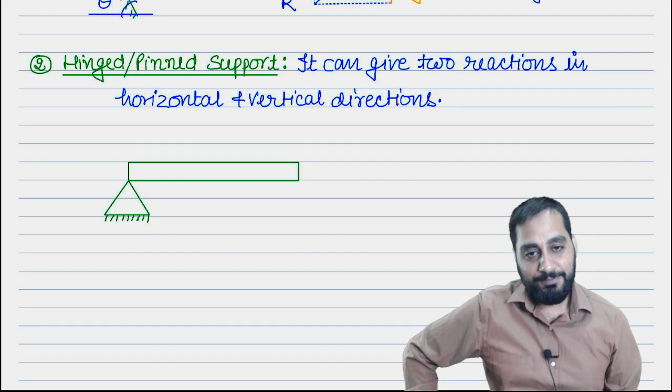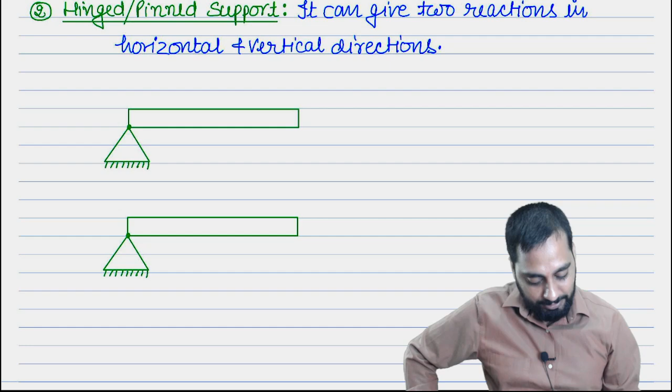Sometimes it is also drawn like this. This is the actual figure. So actually this hinge is like this. You apply a pin here.

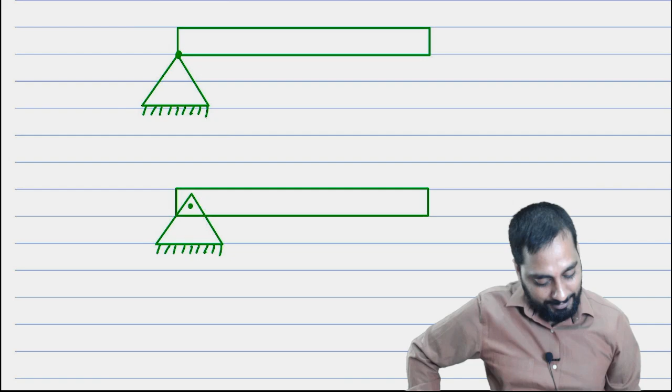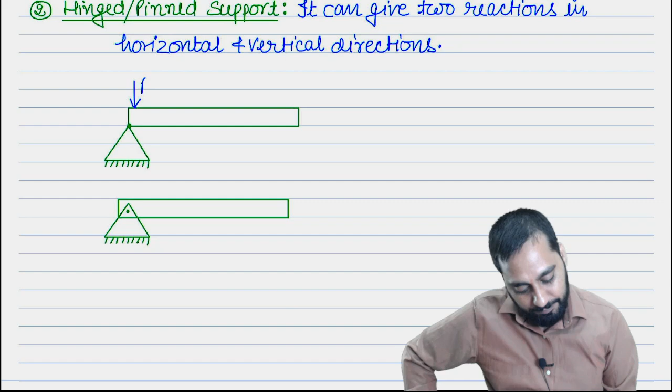Yes, so the actual figure is like this. When you apply a force P here, the beam cannot go down. If you apply a force Q here, the beam cannot go right. It will stop both - when you apply P force here, the beam cannot go down, and if you apply Q force here and pull it to the right side, it still cannot go right.

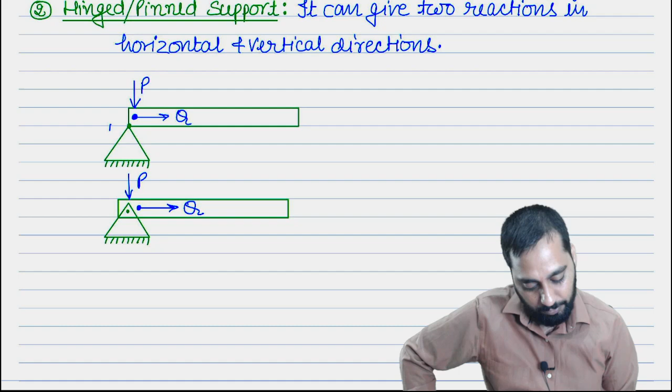Okay, at a point it is a hinge. Hinge means it is pinned - a pin is placed in it. It can rotate like this.

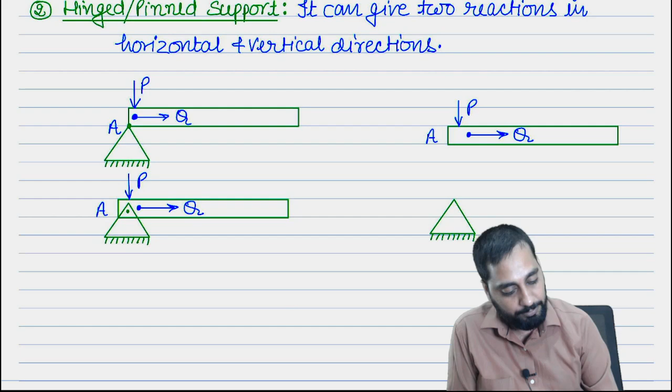So what will be the FBD? So the FBD will be like this. You will separate all the bodies. How many bodies? There are 2 bodies. We will draw both of them. So here both bodies will be drawn like this.

Now P is acting downward but the beam is not going downward. It means one upward force is acting, that is AY. Equal and opposite of AY will act on the support like this. Now Q is applied to the right on the beam, but the beam doesn't go right - it means a force acts leftward on the beam, that is AX.

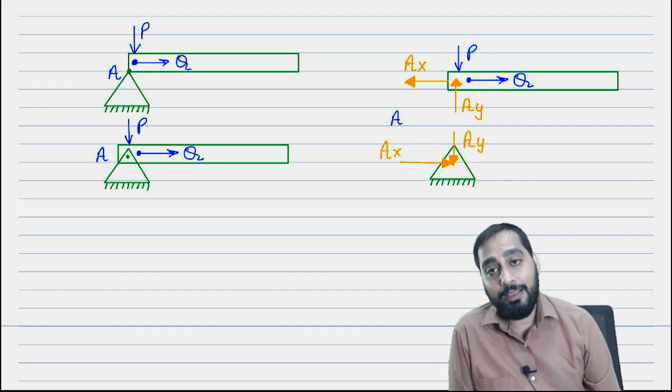One will be perpendicular to the surface and other will be along the surface, meaning horizontal. Okay, so 2 reactions can be there. Now someone can draw a resultant of these 2 - they might say, brother, I'll make a resultant like this. It can be made, but actually the reactions are 2.

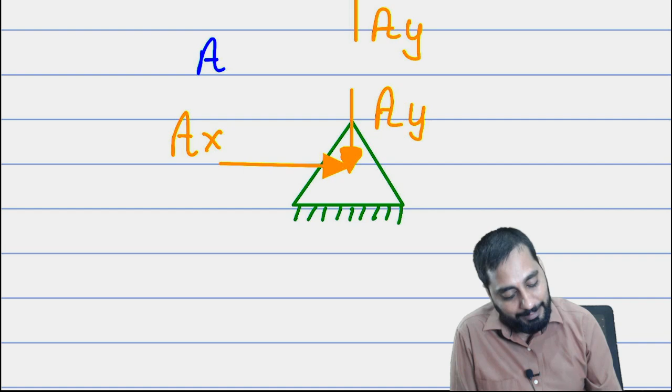So here, this is the thing, this is the thing, this is your point A. This is point A at which all forces are acting. Clear?

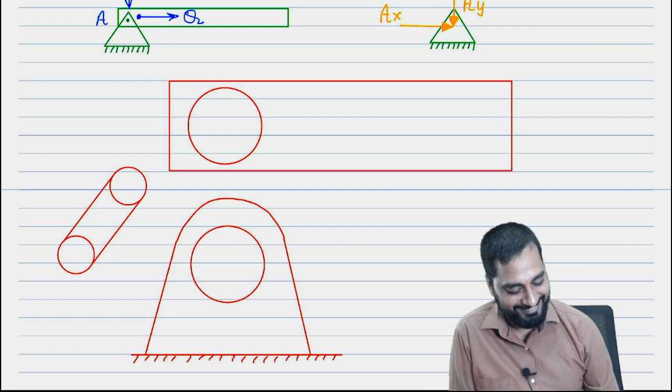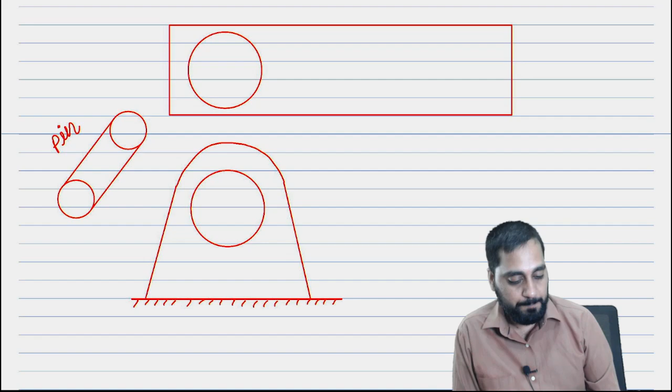Okay, so how is this hinge support made? Look, this is the pin. Okay, this is the pin, and this is the beam.

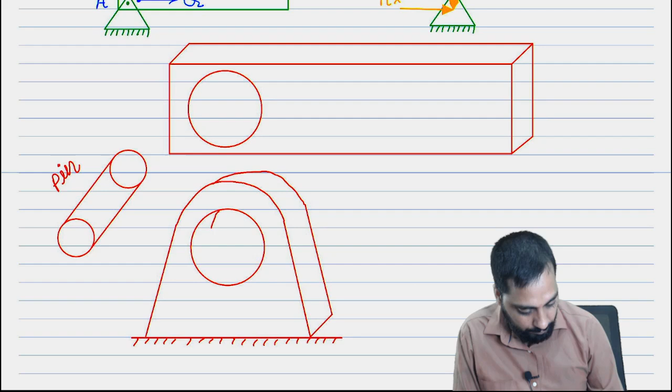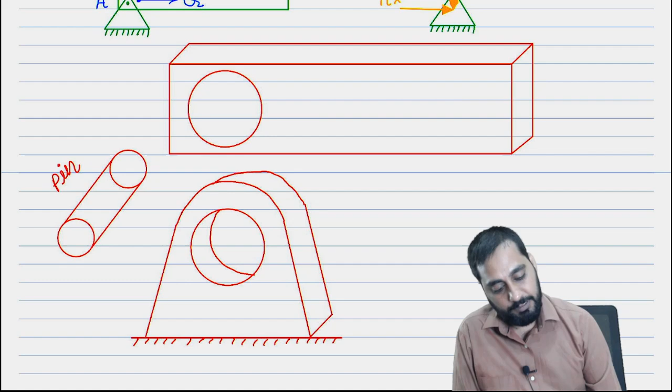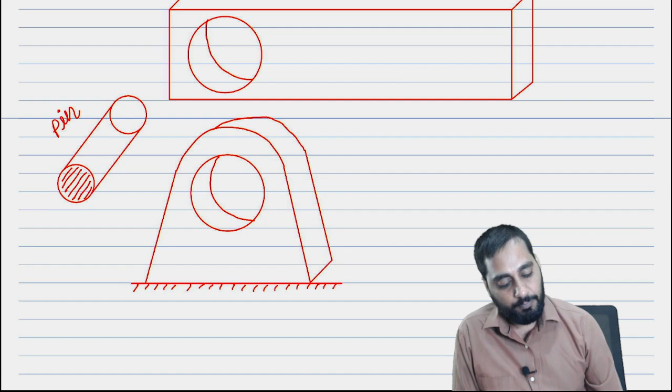Okay. Now, when you insert this pin inside this hole - okay, when you will insert this pin inside this hole - its shaded end will be inserted here. Both sides it will be inserted, yes or no? Both sides it will be inserted.

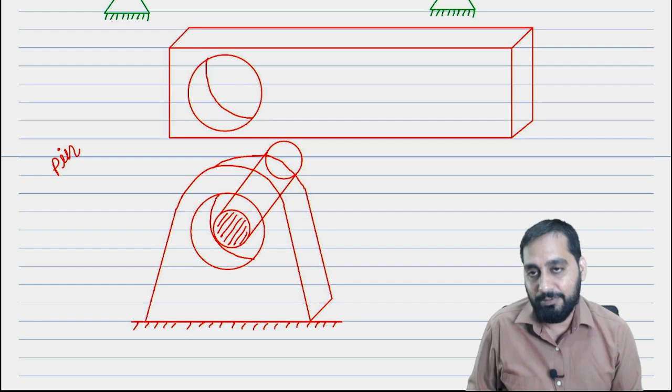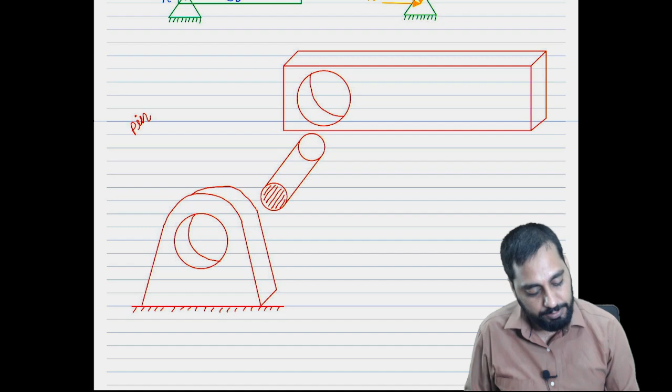So let's draw the figure in a more appropriate manner. Let's bring this here, bring this here, bring this here, a bit this way and that way. Now yes, look here - here what is happening?

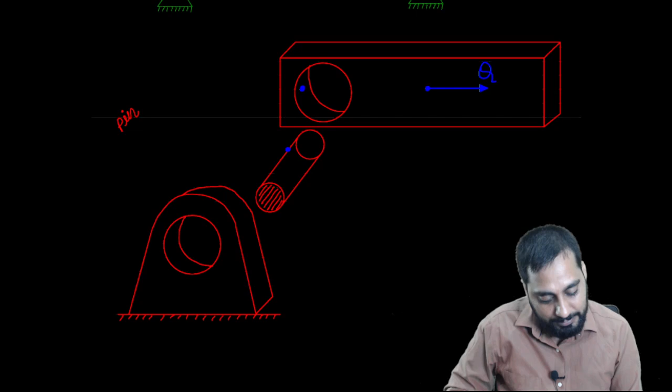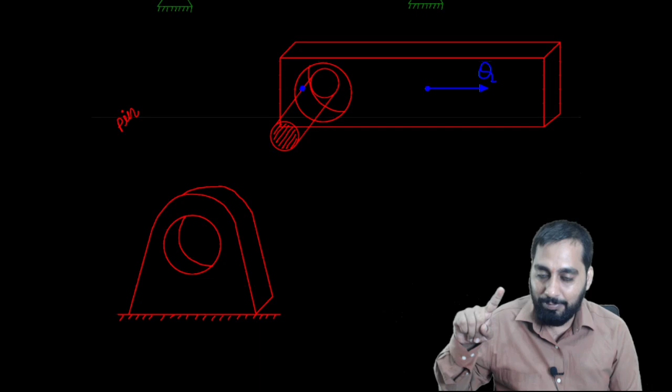When you pull, let's say you are holding this beam at some point and applying a force Q like this, the beam wants to go this side. Then this surface will come in contact with the pin this side, because this pin will be inside this beam. Contact will happen on this side, so this will be the contact point on the beam and the pin.

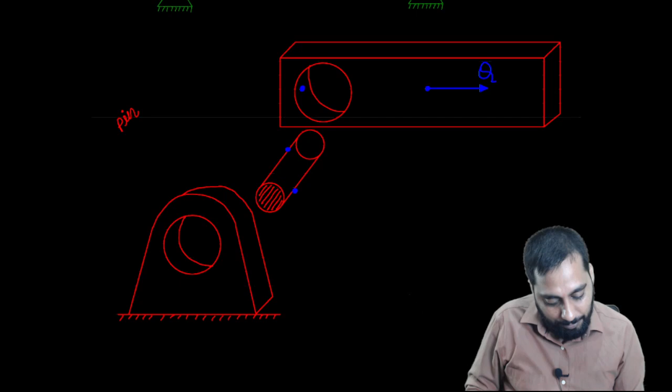Then the pin will try to move, because the beam is trying to go this side, so the pin is also trying to go this side. Now this surface of the pin will come in contact with this surface of the support, because it is also inside this support like this.

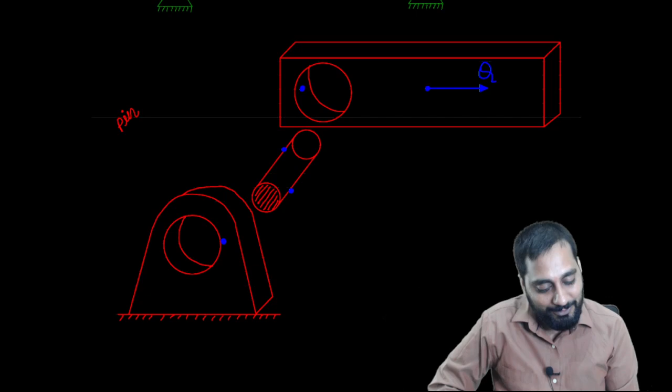Clear? Now, when they are in contact, actually normal reaction will be acting there. So here normal reaction will act on the beam like this, and equal and opposite of this normal reaction will act here like this.

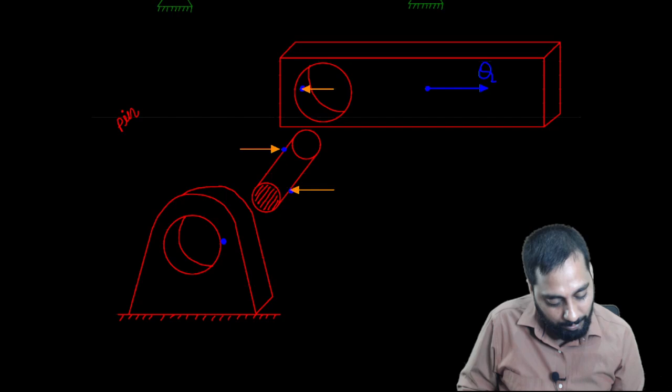Now due to this normal reaction, this pin is trying to go this side, so this point will be in contact with this point. So here normal reaction will again act, because this pin is also at rest, so its equal and opposite will be here like this, and its equal and opposite will be acting here like this.

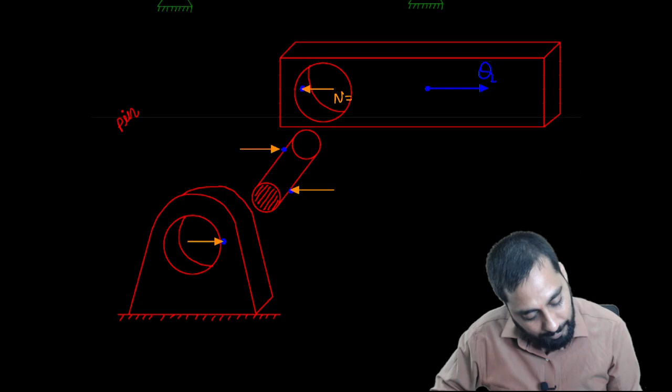Good, so this will actually be normal reaction, and it will be called AX reaction. Okay, everyone clear? Very good.

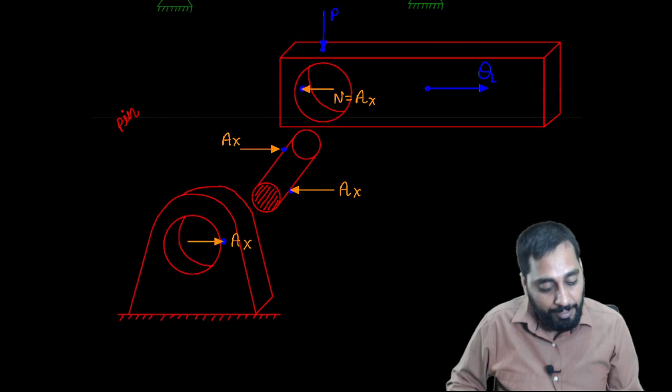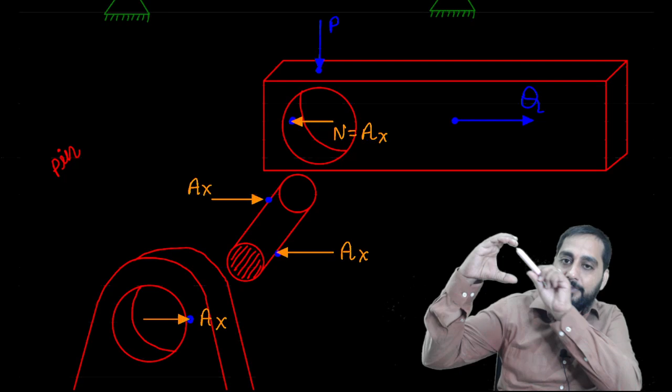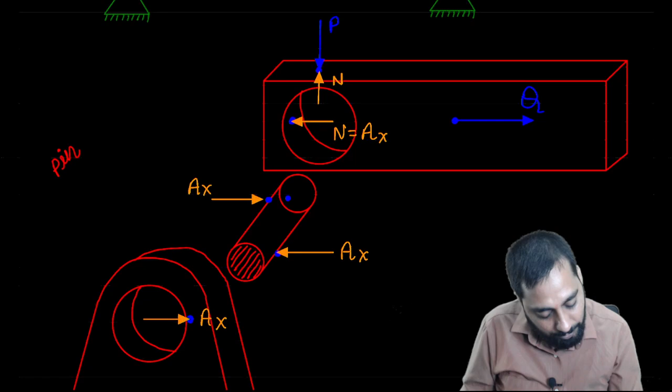So at the top surface of the pin, somewhere here, this will be in contact. So beam is coming down. On the beam there will be a force, again like normal reaction force, and it will be upward. So this N I can call Ax, and this N I can call Ay.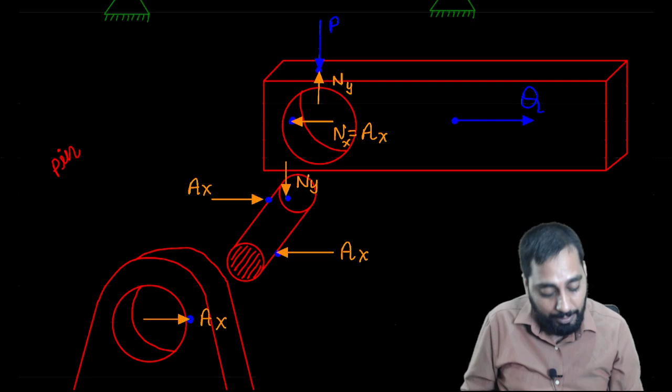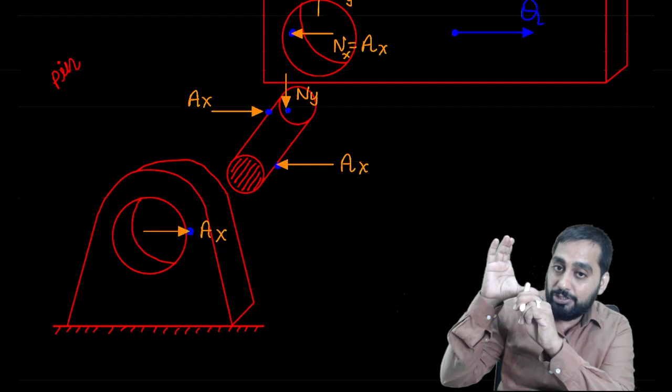Equal and opposite Ny will be acting on the pin. Now pin is trying to go downward. So now pin and this support is in contact. So pin is going downward, so pin will push the support downward.

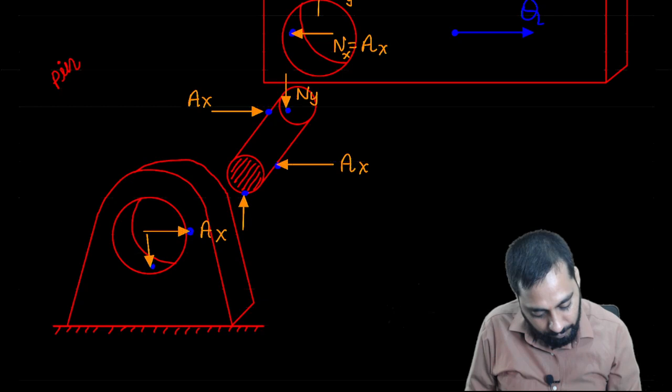So this point on the support, the bottom point, will be in contact. So now here another point from this will be in contact. So here you can see force will be acting like this, upward on the pin and downward on the support.

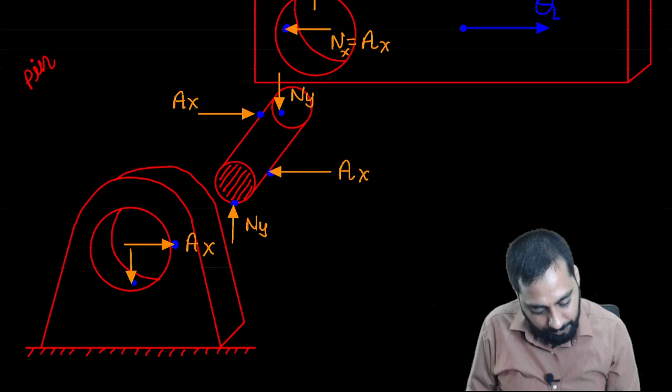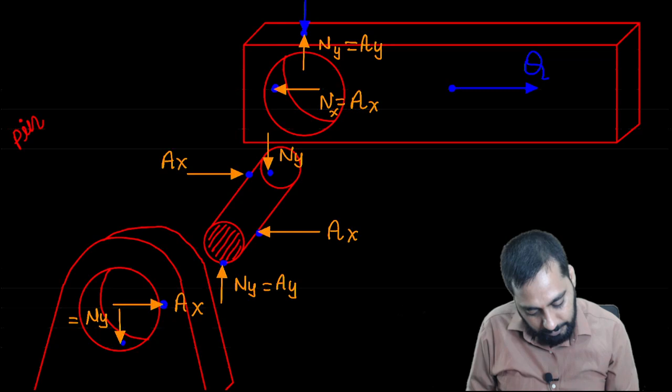So these forces will be actually like this: Nx, Ny, pin is going downward, so it will also be Ny, and all these Ny will be treated as AY. Look carefully at AY, not just forward but also backward, not just up but also down. So all these support reactions are actually normal reaction. Got it or not?

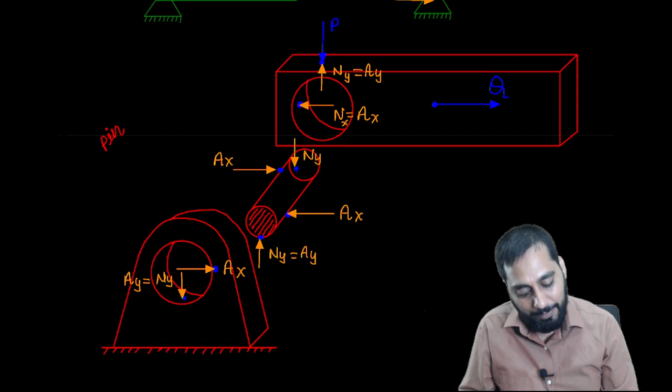This pin will be at rest. Left and right forces are equal. Top and bottom forces are equal. So this pin will be at rest, everything will be at rest. Clear or not? So actually a pinned or hinge support is like this. If we go deeper into this, in machine design we will go into such questions in detail.

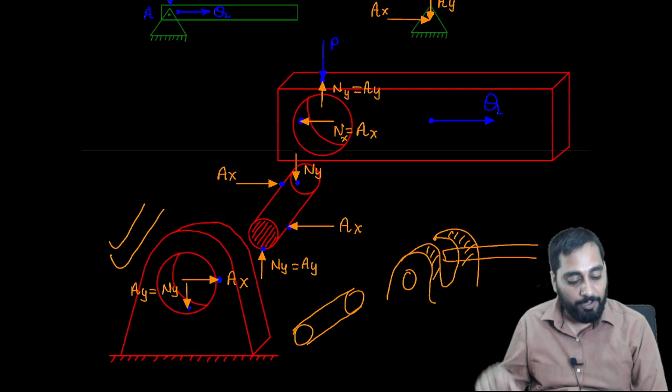And this beam will go inside here, so the beam will actually be sandwiched between these two. Getting the point or not? So actually the pin will be loaded like this, from the beam one force and two forces will be like this, so it will be balanced, and here shear stress will come. In machine design we will see this in more detail, for now this is fine.